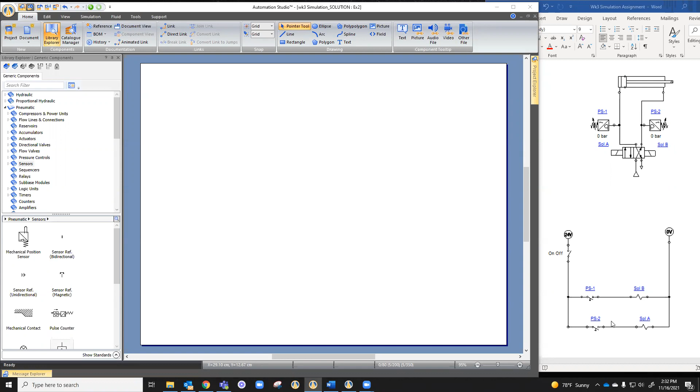For this electro-pneumatic circuit, we're going to use a double acting cylinder with pressure sensor switches connected to our electrical diagram here at the bottom. So let's get our components together, our double acting cylinder and our pneumatics. And then we need two pressure switches.

Now, let's go to pneumatics and pressure controls, maybe. Pressure relief valves, sensors, there we are in our pressure switch. If you look at the diagram, in the top right of the square, there's a little symbol for an open connection, an open switch. This is a normally open switch, pressure switch.

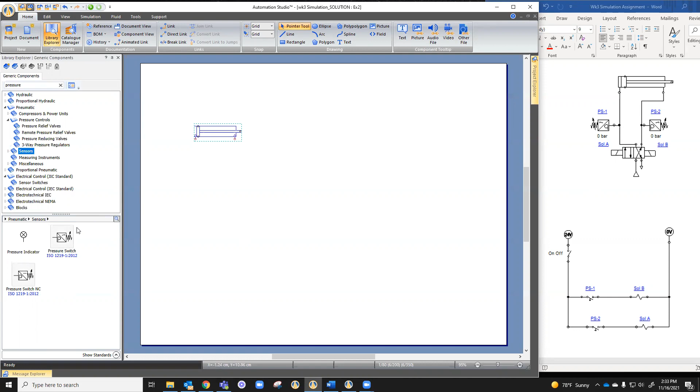And then this other one is a normally closed sensor switch. So when the pressure is reached, it will open the connection. And if you look at the diagram closely in ours, they have the normally closed version. So put one on the right side and it's going to send a signal. This one's PS2, pressure switch 2. And then let's get a second one and put it in here and call it PS-1.

And then we're going to change the orientation. So we're going to go up to edit and position, and we're going to rotate it or flip it across a vertical line. Let's do that. Okay. Now we have those two lines, and then we need our directional control valve. It's a 4-2, so it's 4 ports and 2 positions.

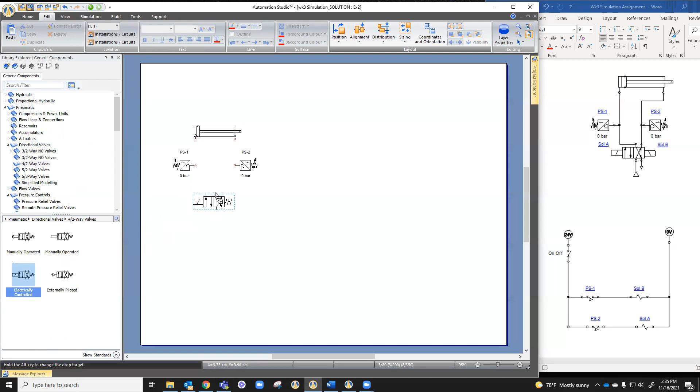So let's go to our pneumatics. Doesn't like the 4-2, but I know it's in there. So let's go to pneumatics and directional control valves. I have 4 two-way valves. Looks like here's one that's close. It's not perfect, but it's close. So it has the crisscross on the right box, right position, and a straight through on the left. And it's a 4-2 valve, but it has a spring return, and we don't want the spring return.

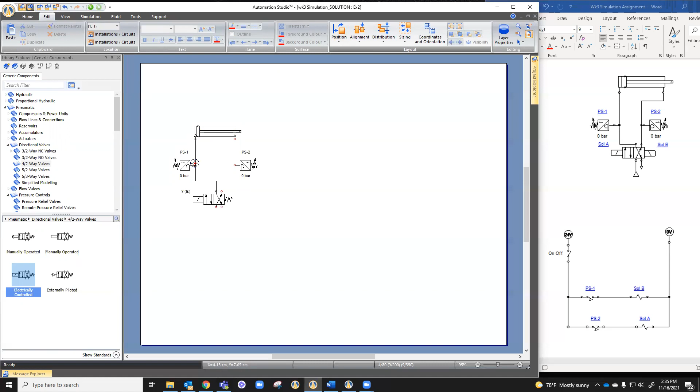So let's first connect what we do have. I'm gonna make that double connection. Now that one's black. If it's not black, then it doesn't have both lines. I need my pressure source. So just bring it in to connect it, drag it down. Then I need my exhaust. Okay, I have the solenoid 1. So let's get this solenoid 1 labeled, and then we'll change the box over so that we have 2.

Actually, let's do this first. If we go into our directional control valve and we go to variable assignment, accessories. Oh, we're selecting on the solenoid because I did that previously. So I want to make sure it's not red. I want to just click outside the box here, or outside the diagram. If I click on it, it limits what I'm editing.

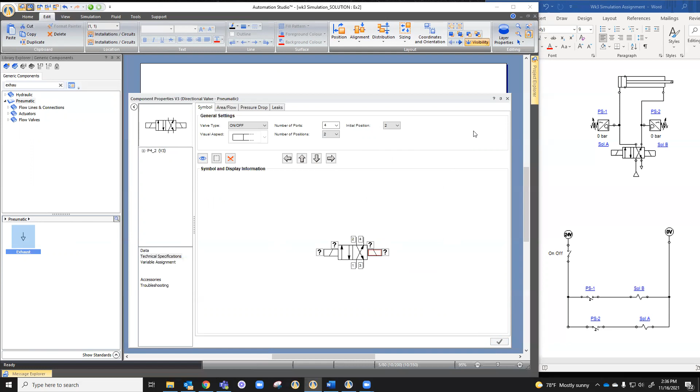So when I click on the outside there, then I can go to technical specifications. I can double click on the spring and change it to this solenoid. Make sure I hit the green check marks. And then I should have 2 solenoids instead of 1. I need solenoid A on the left and B on the right.

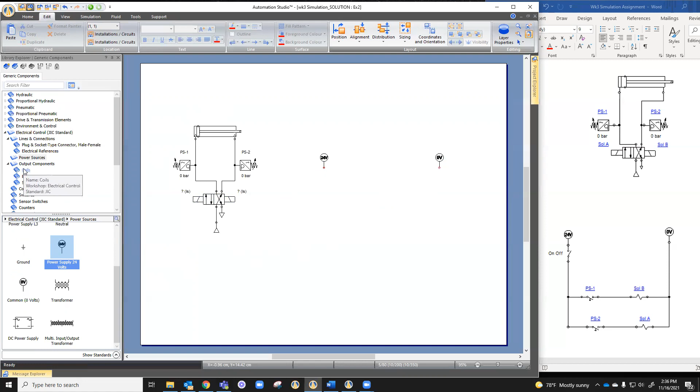Let me get the electrical diagram going. So clear my search, and I'm going to go to my JIC standards, is what I'm using. And let's do our power source, 0 volts and 24 volts. And then I have a contact, a switch here. The on-off switch is a normally open toggle switch, matches the diagram here. And we'll call this the on-off.

And then we need to rotate it. So we go to edit position, and we're going to rotate it 90 degrees to match the diagram. I can connect the red and then drag it down if I want. But now I'm connected to the 24 volts. I have 2 pressure switches and 2 solenoids. So I want to go to output components. I can get a solenoid in for solenoid B. I call it solenoid B. And then I can get another solenoid here below it. Call it solenoid A.

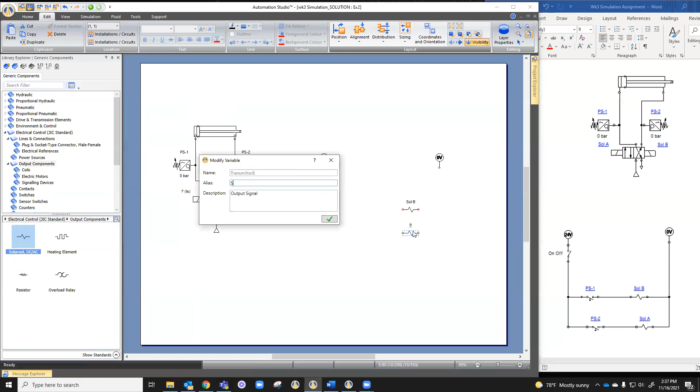And then I need a switch, a sensor switch. I have a proximity switch, but I want the pressure switches to go with my pressure sensors, and they're both normally open. So I bring my two normally open pressure switches in there. And let's make the connections. Okay, now I can connect solenoid B and solenoid A, and I can connect these pressure switches to the pressure transmitters here. So let's go into our solenoids.

And again, I'm not sure which one is there, but I know that the left one, if I click on the left one, it will single it out. And I know I want that to be solenoid A. Now I labeled solenoid A from a different project, so I need to hover over there and see where it's located. See in the box that comes up, I can see the location.

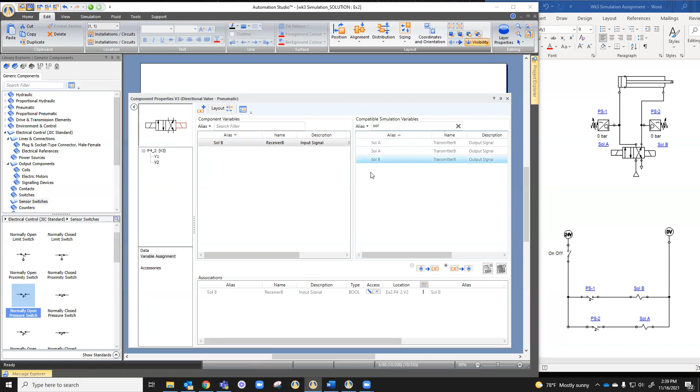Well, I named this project exercise 2. So if I look here, I see exercise 2, and then I can click that for solenoid A on the left. And then I can click over here to the right one, and it's not connected, and I want solenoid B. Now I have solenoid A and solenoid B, all blue now.

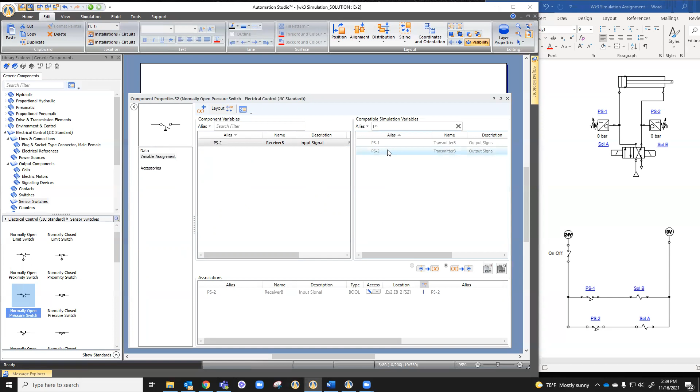Then we'll go to this pressure sensor switch, and this is pressure sensor 1. So I need pressure sensor 1, double click on it. And this one, I want pressure switch 2. So pressure switch 1 goes with solenoid B, pressure switch 2 goes with solenoid A. And then my circuit should be connected, and I can test it. When I hit the on-off, it should go back and forth and make the switch as it reaches the pressure.